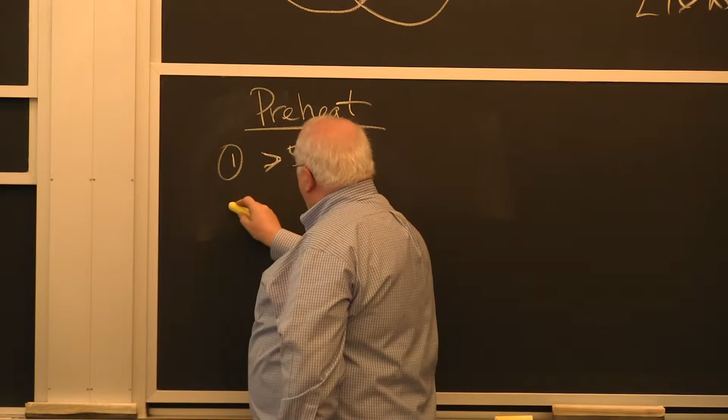So there's 3 levels of preheat. One is must be greater than 50 degrees Fahrenheit. One is you heat the steel from, let's say, 100 degrees Fahrenheit to 300 degrees Fahrenheit. And the third level is greater than 300 degrees Fahrenheit. Well, what are we doing with each one of these? The ASME boiler and pressure vessel code says you shall not weld on steel if it's below 50 degrees Fahrenheit. I don't care if it's the mildest steel in the world, you don't weld if it's less than 50 degrees Fahrenheit.

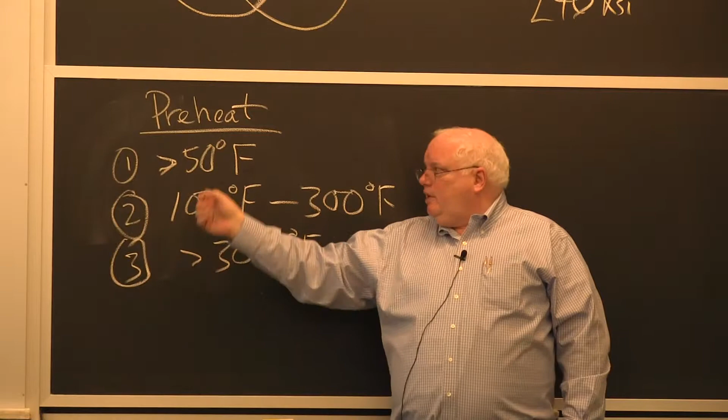The structural welding code, well, these 2 codes, ASME boiler and pressure vessel code. ASME is American Society of Mechanical Engineers for all you MEs. And the structural welding code, which is basically the welding society, but civil engineers use it. Anybody building bridges and buildings uses this. Anybody building pressure vessels uses the ASME code.

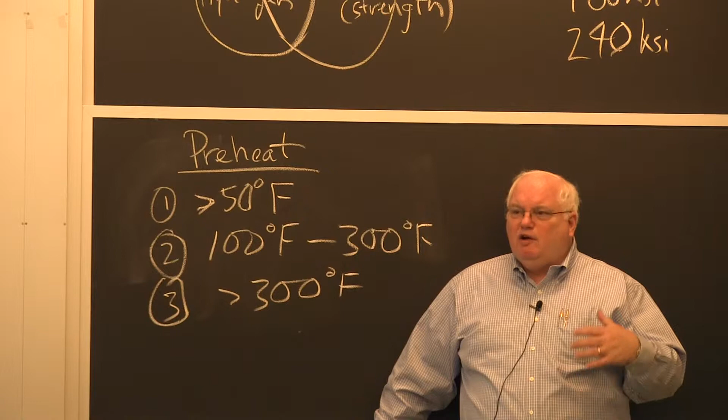Because even though you can't see it, there's a layer of moisture on steel. There's a layer of moisture on that table, as we're talking right now at room temperature. But as you get lower and lower in temperature, towards the freezing point of water, that layer of moisture gets thicker and thicker. 50 degrees drives off enough moisture that they have found they don't get cracking by welding on steel that's above 50 degrees. So you've got to be at a 50-degree minimum for surface moisture.

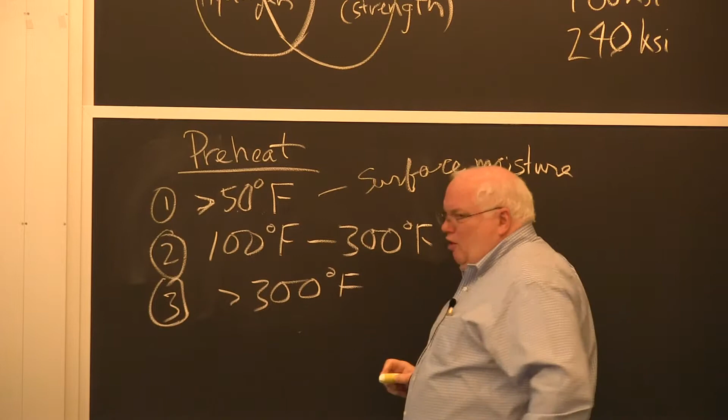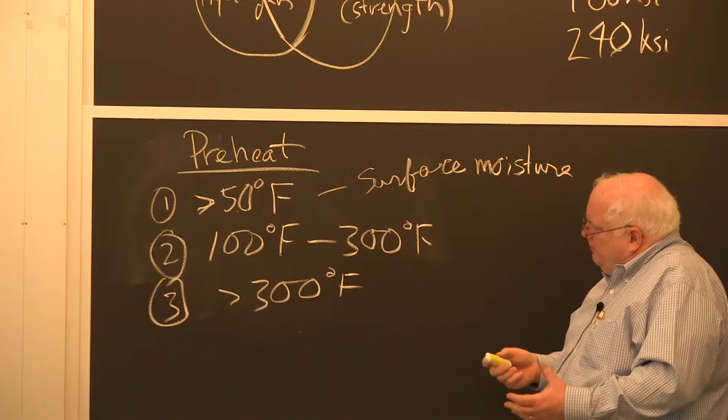You got to drive off surface moisture, no matter how mild the steel is, no matter how low the carbon is, no matter how low the hardenability of the steel is. You still got to get rid of that surface moisture, and that's why the 2 codes say 32 degrees, 50 degrees, whatever. You don't weld on snow. Okay, 100 to 300 degrees F. What am I doing? I'm slowing the cooling rate.

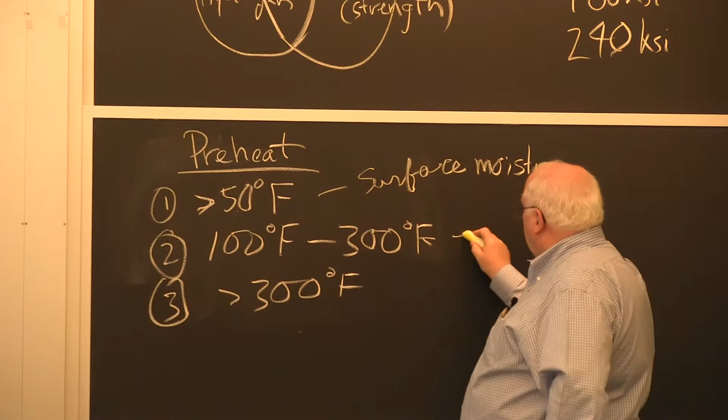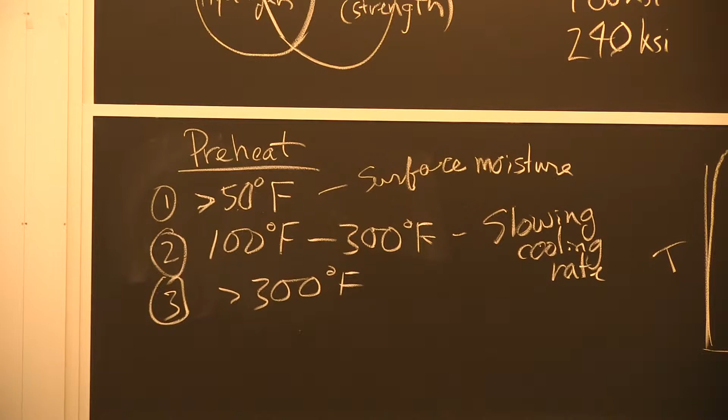If I look at a thermal profile for striking an arc, temperature versus time, there's a very rapid rise in temperature up to the melting point, and then it cools down on an error function solution, for all you mathematicians out there, which is all of you MIT students, but it slows down to some ambient temperature.

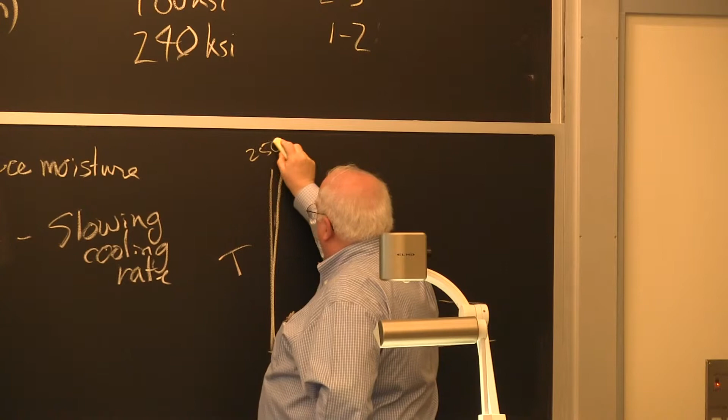If I'm heating up rapidly to, let's say, 2,500 degrees Fahrenheit, or actually it's about 1,600 degrees centigrade, and I cool down to room temperature, this stuff gets to low temperatures within a couple of minutes, and I trap all that hydrogen. Remember, 25 degrees is the worst temperature I can be at.

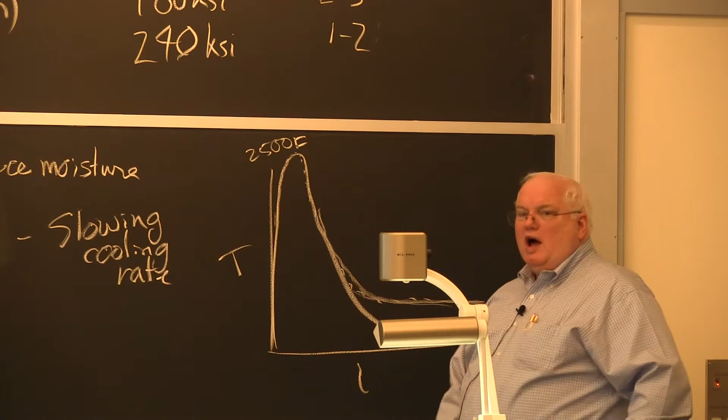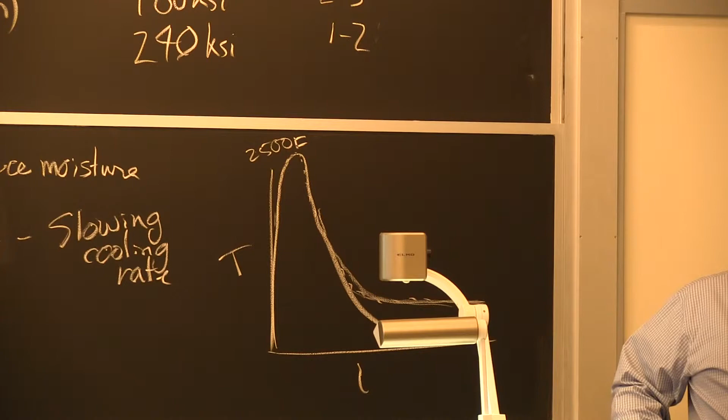If I heat it up to 100 degrees or 200 degrees, it will cool down, but it will cool down to a higher temperature, and it will stay at that temperature for this great big piece of steel that weighs several tons for an hour or two. And that allows the hydrogen to diffuse out. I'm taking advantage of that little V-shaped curve I showed you.

At higher temperatures, even in this temperature range, I'm not going to have minutes before I get down to room temperature. I'll have hours before I get all the way down. And it's like doing a bake-out at either 100 degrees or 200 degrees or 300 degrees, whatever my temperature was that I preheated to, right?

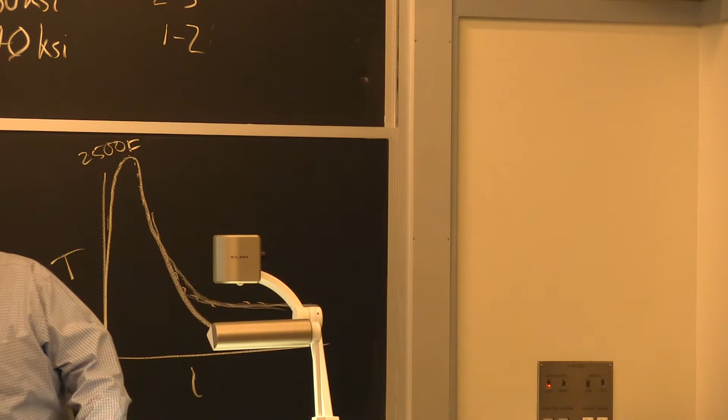Above 300 degrees, I'm tempering the steel. And by tempering the steel, it turns out steels will lose their hardness. If you form martensite in the welding process, and you then hold it at temperature for an hour or whatever, once you get to 300 degrees Fahrenheit, or 150 centigrade, you start to see a drop off in hardness.

And so if this is 300 Fahrenheit, and this is probably log time as I've drawn this, you'll have enough time in here above what you would have if you were just letting it cool and being quenched to room temperature by the steel.

So what am I doing if I start looking at my Venn diagram? The first one, I've got whatever stress, I've got some hardness, which is fairly large, but I'm trying to make the amount of hydrogen circle smaller. So in my Venn diagram, I'm reducing the hydrogen by getting rid of the moisture.

On this one, I'm doing the same thing, but I'm reducing the hydrogen by giving more time for the hydrogen to diffuse away, because this steel is even harder. What am I doing here? I've got my Venn diagram. I'm trying to reduce the hardness and the hydrogen. I'm working on both of them, okay?

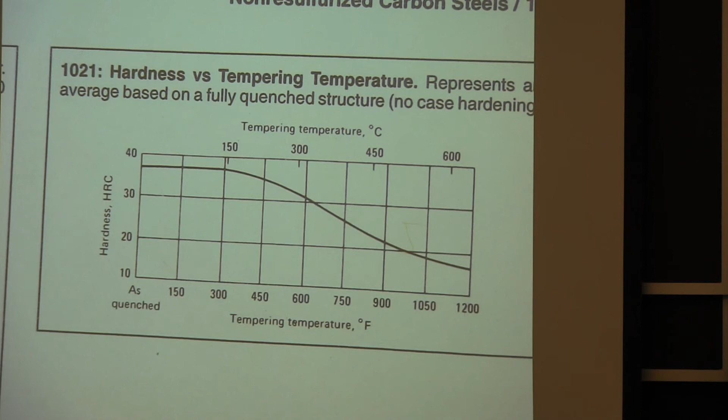So you won't find this explanation anywhere. I made it up a couple weeks ago. No, I did. As I was looking at preheat, I've always sort of known it, but until I had to teach it to you, I hadn't really articulated it.

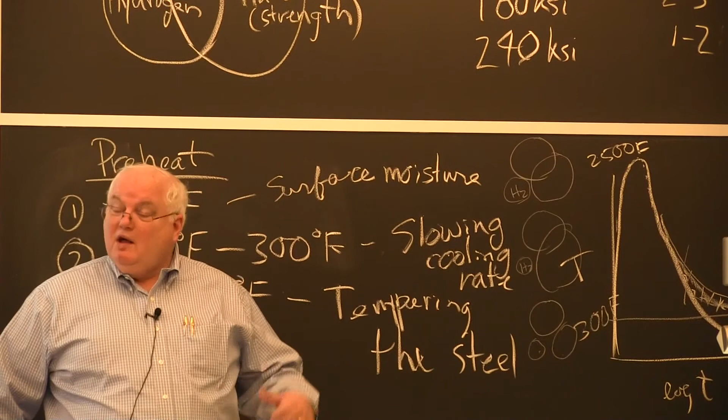But if you think about a Venn diagram, they just talk about preheat and they say, this is the preheat you use. It's a cookbook. You go to Stout and Doty, it tells you. But if you actually want to start thinking about it and how we control hydrogen, we walk through it this way, okay? So that's enough for today.

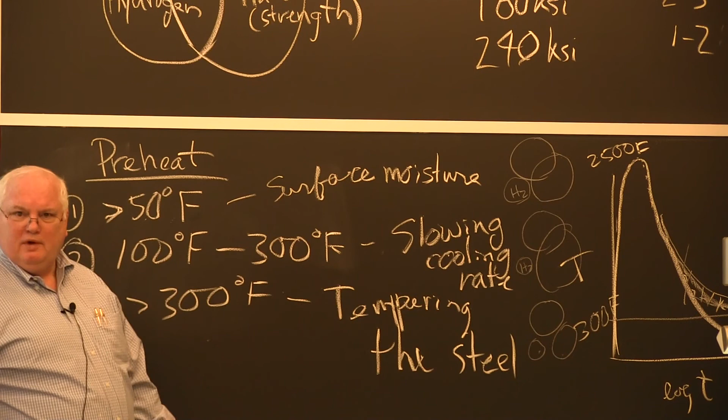Tomorrow we'll be here and hopefully we'll finish up preheat and post-heat and all that stuff.